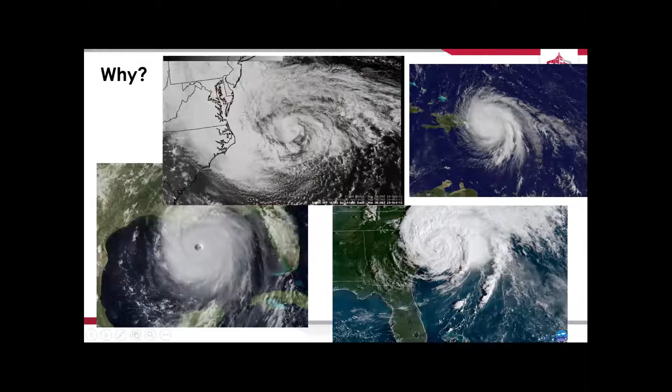So why do we do flood forecasting? Why do we care? Well, given the events of the past week, and really the past year or years, we see that we continue to be impacted by events like what you see on this slide. Pretty much every coastline of the U.S. is impacted by coastal storms of one flavor or another. Here we have Katrina, Florence, Maria, and Hurricane Sandy. Hurricane Sandy is the one that's near and dear to our hearts up here in the Northeast, because it generated a significant amount of damage and impacted us in this region in a manner which we're relatively unused to dealing with. So we know we have this issue.

What does it cause in terms of impacts on transportation infrastructure? This series of pictures illustrates just some of the impacts we see related to these storms. I selected these pictures specifically to point out that when we say transportation, this is intended to cover many aspects—you see airports, trains, buses, cars, cargo containers, bridges, subway tunnels, touching on all different aspects of transportation. Obviously there are many impacts that go beyond transportation, but today we're mostly focusing on transportation impacts.

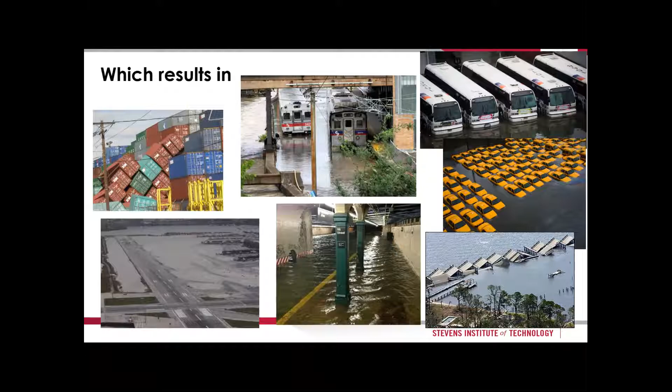Of the pictures you see here, only one, the bridge in the lower right-hand corner, does not correspond to Hurricane Sandy. So these are just examples from my personal neck of the woods up here in New York and New Jersey.

As illustrated on that previous slide, when we talk about flooding, which is something we're generally concerned with here at Stevens, when we think about transportation system impacts, we think of it in a number of different ways. The first way, and certainly the first impetus for our flood modeling research, has to do with actual flooding of major highways, freight and passenger rail, airports, and port facilities. Basically, what's going to get wet and when is it going to get wet.

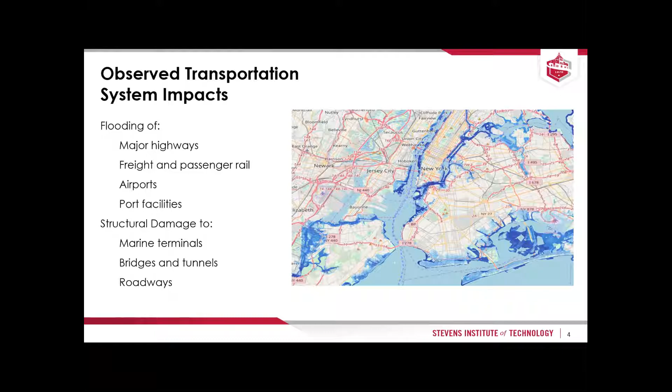That's certainly one aspect, but another aspect which we haven't quite explored in as much detail, but certainly have the capabilities to, is to look at what this water does in terms of structural damage potentially to facilities like marine terminals, bridges, tunnels, and roadways. These are all areas of ongoing research, but there's opportunity to take the flood forecasting and advanced hydrodynamic simulations we're doing now and scale that up for other studies, like studying when bridges might fail. There's certainly more opportunity to go further than where we've come so far.

One of the things that is particularly important for transportation infrastructure is advanced warning. We're concerned not only with predicting how much water is going to get where, but also the timing of that—when is the water going to get high? This is really critical because transportation provides a mechanism for people to evacuate. We need to understand when to begin shutting things down, when to make preparations, change lanes and roadways, and so on. Providing information is only useful if we have enough lead time, so we're able to give information far enough in advance that people can react to it.

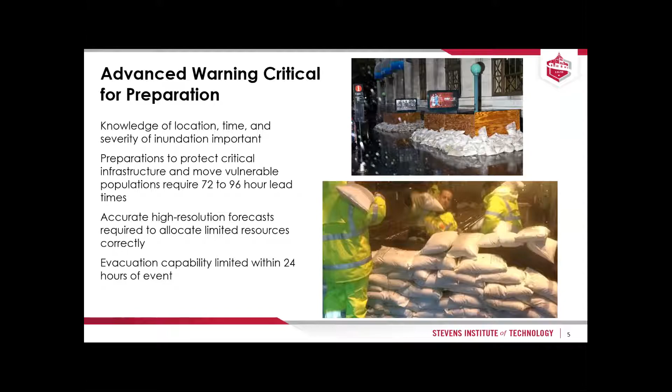In dealing with some of the aftermath of Hurricane Sandy, and working with operations and emergency managers here in New York and New Jersey, roughly 72 to 96 hours is the lead time commonly specified as necessary for making critical decisions. As I said, we've been studying storm surge modeling and flooding here at Stevens for quite some time.

After Sandy, we revived, or changed the way that we look at flooding, and we developed what we call the Stevens Dynamic Overland Inundation Modeling System. It's a system that looks not just at the water when it's out in the ocean, bays, or rivers, but really at what happens to the water when it starts to come onto land. So the overland inundation part is something that's pretty much new for us since Hurricane Sandy.

The background, or the backbone of our modeling, is based off of our New York Harbor Observation and Prediction System. This is a system we've had in place at Stevens for a decade and a half now, predating Sandy. It's basically a system for predicting storm surges, currents, salinities, water temperatures, etc. It's based on a derivative of the Princeton Ocean Model, and it's an operational forecast for NOAA through the IOOS program.

The enhancements we're working on now and perfecting have to do with overland flow, incorporating rainfall—so not just considering water coming in from the ocean or offshore boundaries onto the land, but also water coming down through different watersheds, streams, and tributaries, and making its way into areas. And then ensembling. We'll talk a little bit about most of these.

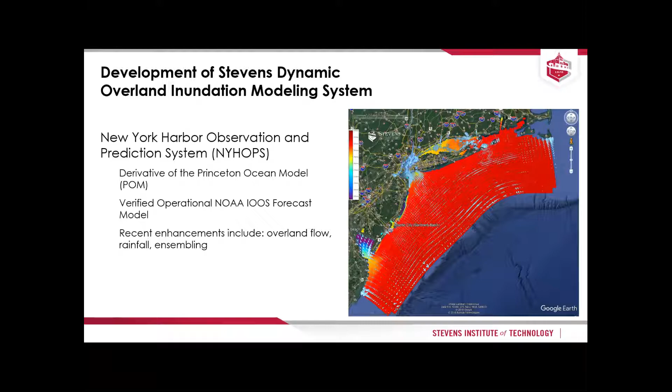For those of you into the geeky side of this, here's some information about the NYHOPS system. It's based on a shallow water version of the Princeton Ocean Model, specifically called ECOM. Our hydrodynamic model is dynamically coupled with a model for predicting waves—in this case, a derivative of the Great Lakes model, modified specifically for our applications, including offshore boundary conditions from swell propagating into the boundary. We use this modeling system as the backbone for everything that we do.

We actually run our NYHOPS model operationally, which means it's run both in storm conditions as well as just day-to-day conditions. There's a number of inputs that go into forcing the model: tides, surges, waves, pressures, rainfall, river discharge, ice, you name it.

There's many inputs that we get from sensors we put out, as well as sensors other people put out, and forecasts from the National Weather Service. All that information goes into the model, which crunches the numbers, and we output 96-hour forecasts multiple times per day. These forecasts include total water levels, currents, salinity, temperature, wave heights, and periods. We've been doing this since 2006.

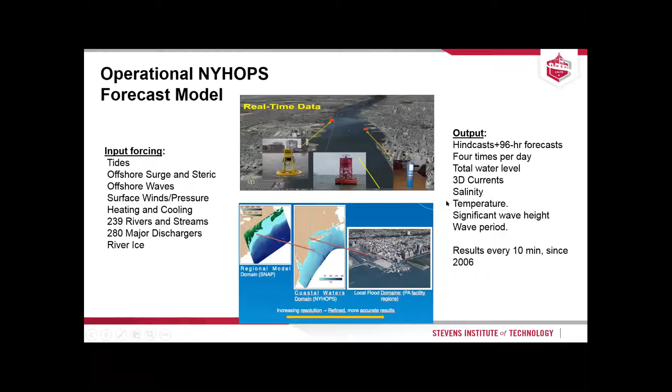One of the new things since Sandy is really understanding how water moves over land and potentially impacts things like transportation infrastructure. In order to do that, we've incorporated an overland flow portion of the model.

This requires really high resolution information related to the topography of the land the water is flowing over. Fortunately, we have lots of great LiDAR data sets now from which we can derive DEMs that are very high resolution, and we use this in combination with numerical techniques, like depth integrated equations of motion, to predict what happens to the water once it reaches that land-water interface.

Based on that, we can predict water levels as well as currents inside of model cells which happen to be over land, or generally dry when there's not a storm occurring.

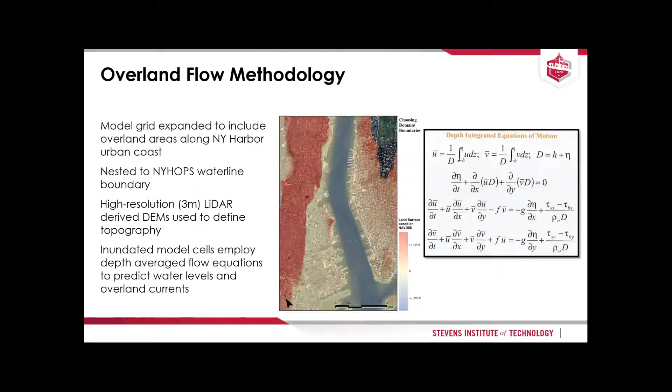So the model, of course, is calibrated. The real thing I wanted to point out is that this can only be done when we have accurate data to ensure we're actually modeling something real. There's a lot of information, a lot of data points that come in that we can calibrate and validate to. So collection of actual real data is an important component of this.

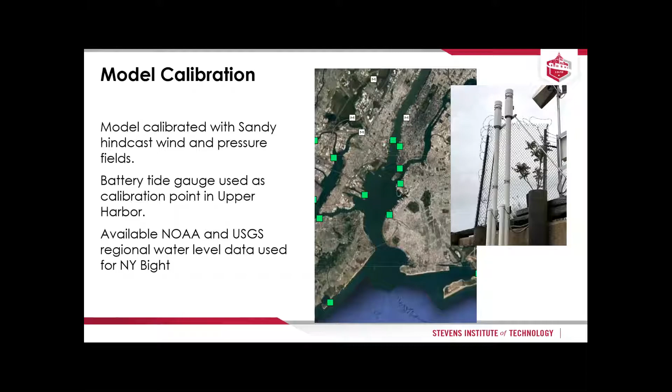The model has been calibrated, particularly for our Sandy calibrations, using the battery tide gauge in the Upper Harbor.

For validation of the model, we took a look at our Sandy simulations, and we validated that using information obtained by the USGS, as well as an interesting thing: we used some crowdsourced pictures for estimating peak water level.

People went out after Hurricane Sandy and took pictures of where they saw water, with a timestamp on that. We were able to utilize some of that as part of our validation, not as an entire validation, but it was interesting to incorporate that technology.

We were just talking about getting on Facebook Live. Well, this is sort of an application of that social media technology.

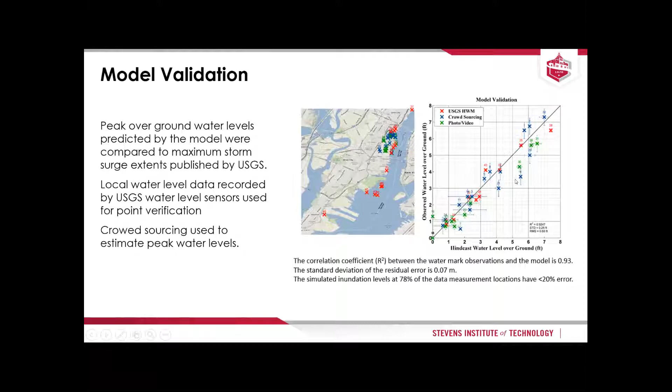Overall, you see in the plot on the right our model validation curve, which shows that the model works really well, meaning we can use it for a lot of interesting things.

Here's an example of an application of the model to transportation infrastructure. What you see here is actually a simulation of flooding during Hurricane Sandy, showing a rail yard.

The movie should be running. Hopefully the video stream is working.

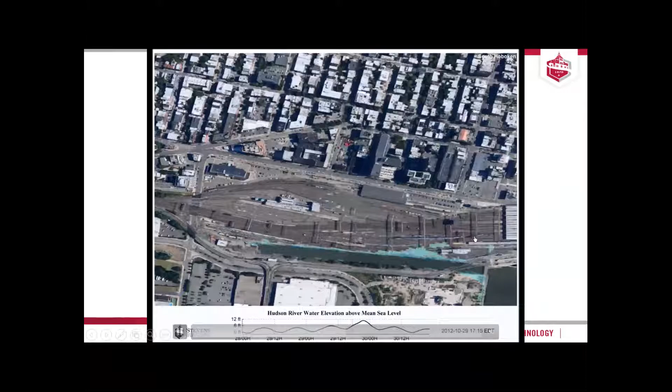What you'll see on the bottom here is the tidal curve. The water starts to get high on the high tide before the peak, then you get towards the peak and the water comes in, and we can figure out what's getting wet and where. The arrows are actually the current velocity vectors, so we're getting not only water surface elevations but also velocities of water. For example, if you have infrastructure here, you can figure out what the loads on that infrastructure might be.

One of the really important things that has allowed us to go out to 96 hours is implementing ensembles. This is one of the main things we've been working on, in addition to the overland flow. In order to predict out a significant amount of time with confidence, we needed to improve the way that we were modeling. Originally, the NYHOPS model was a single model based on a best forecast, but more and more we realized there's all these different ensembles being performed for weather modeling, so we needed to adopt a similar technique for our hydrodynamic modeling. Essentially, we've adopted this ensemble approach where we look at 125 different weather models.

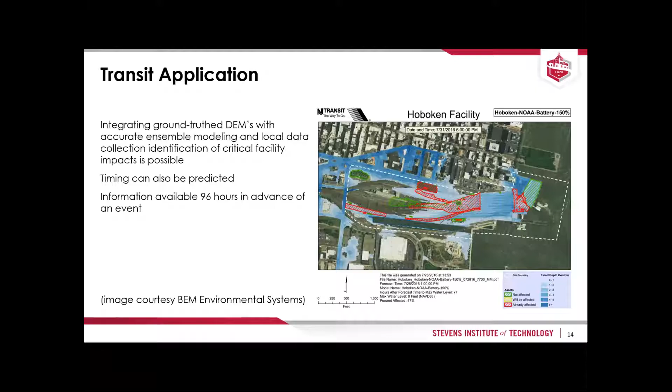So far, everything we've talked about has been on the operational side. We can utilize the information from this type of modeling for operations - for example, if you own that rail yard, you can figure out what precautions you need to take, where you might have to move your trains, et cetera. That's one application of what we do. But with this tool, we can also begin to look at applications to planning and design, through running different types of simulations.

This slide gives an example - we can do different types of scenario building exercises. One of our researchers, Dr. Orton, has worked extensively on taking the models we have and applying them to long-term, long-range climate type scenarios. This allows us to explore different potential sea level rise scenarios - what happens if we add the current trend, what happens if we look at the worst case sea level rise, and how that impacts the values we see, both in terms of flood heights, but also currents, forces, and waves.

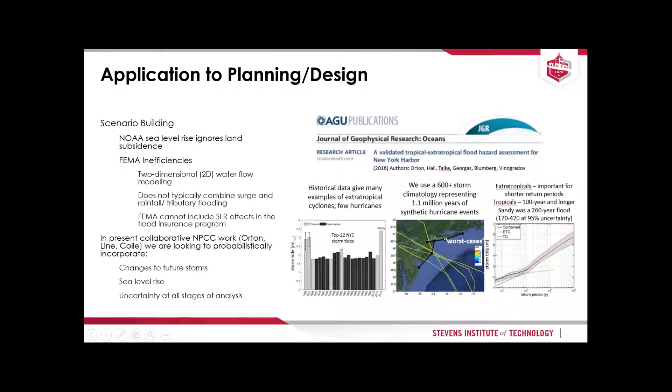I'm already at my conclusions. Basically, hopefully what I've tried to show here is that there's a lot of really interesting work. We've obviously focused on the work that Stevens has been doing here, but in addition to Stevens, there are other groups working on similar types of aspects.

Really, we've come very far in the past decade in terms of being able to use advanced high-resolution hydrodynamic models, and that advancement has allowed us to do things both on the operational side, providing relevant, accurate information for decision makers and emergency management, providing flood forecasts 96 hours in advance. One of the main tools that has allowed us to go out that far with accuracy is the ability to do these types of ensemble modeling approaches.

We didn't really talk about it, but the ensemble modeling approaches require significant computational power. But nowadays, with supercomputers and clusters, this is becoming less of a limitation, so we're beginning to move in that direction more and more. Another thing the ensembling approach allows us to do is provide estimates of uncertainty. The gray envelopes you saw in some of those plots give us an estimate of the maximum and minimum water levels we potentially expect during storms, and that uncertainty can be very important to decision makers, but also on the design side as well.

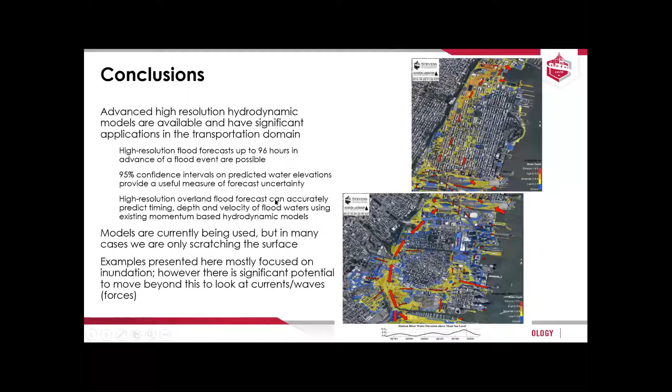And certainly, of course, I want to thank some of our current and former colleagues who have contributed significantly to the development of this model over the past 15 years or so. And I think that's all I had.

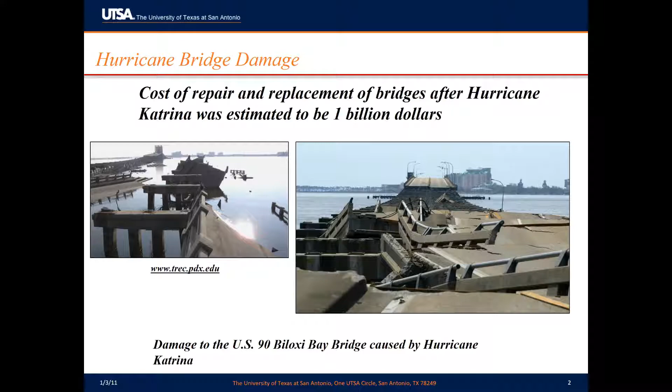We all know the outcome of Hurricane Katrina. It cost a lot of money in terms of damage to infrastructure in Mississippi and Louisiana, and the repair in the aftermath was very significant. So the impetus of our research program is to learn about the hydrodynamic problem so that we can get a better understanding on how to design our bridge structures to be more resilient.

So if we think about the hydrodynamic response of bridge structures, there are two factors that affect it. There's certainly the characteristics of the waves, the height of the storm surge, and the dynamic characteristics of the waves themselves, wave amplitude, wavelength, and others. Didn't want to crowd the screen to make a full comprehensive list.

Folks in the water resources area and hydraulics have done a lot of work related to understanding waves and their characteristics and the type of pressures, if you wish, that they generate on bridge structures. And then there's sort of a dividing line and a gap there, and the structures people maybe come up with some equations to quantify those demands and design the structures appropriately.

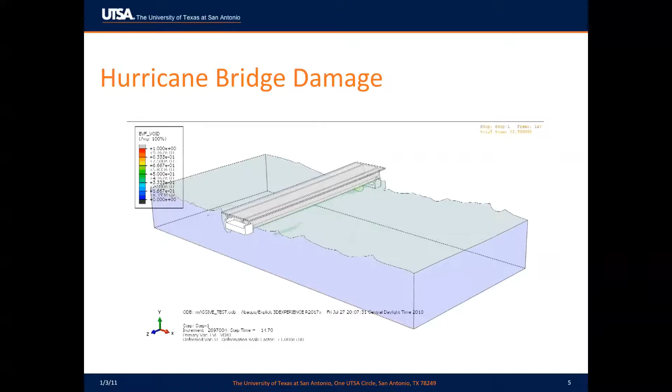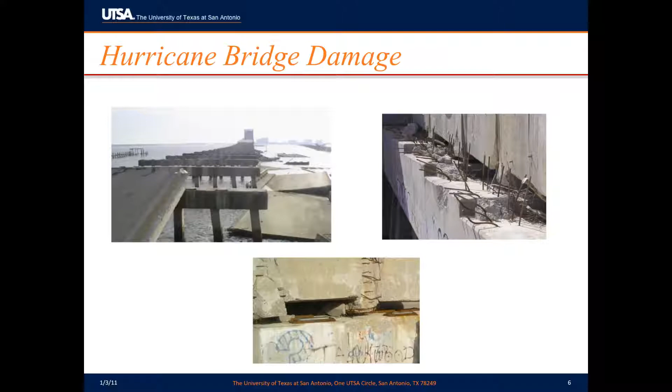And so also reading the reports from Hurricane Katrina, we found a lot of different types of connections. There were instances in which the bridges were simply placed on top of the piers. There were instances in which the bridges were actually anchored with some reinforcement to the piers. And there were instances with shear keys. And there was damage in all of these. So it's the impetus of our project to try to understand a little bit better the magnitude of those forces for different ranges of wave characteristics, so we can understand how to design the connections better.

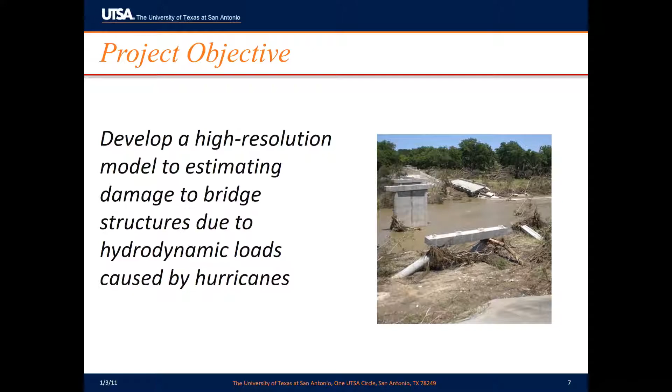There's some similarities between what happens then and what you have in a blast type situation, where you get a very sudden force from the wave impact, and then a dynamic response that follows. That has different implications for the bridge superstructure than for the connections. Those of you who've designed precast panels to blast loads know that the connections between the panels and the building are a real area of concern. The same thing happens in bridges, and we don't understand very well how that evolves and what type of damage we can expect for different types of connections.

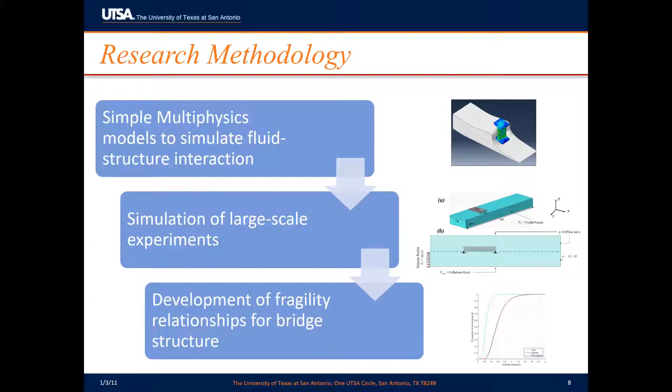One of the areas where there have been helpful developments in computational mechanics is we're beginning to see mainstream multi-physics models that we can use for simulating fluid structure interaction problems. Also, clusters and supercomputers are becoming more common, so we can attack problems that are larger in scale. Ultimately, what we're trying to do is use those methods and the additional computational resources available now to develop fragility relationships, where we quantify the probability of damage that bridge structures incur during hurricanes.

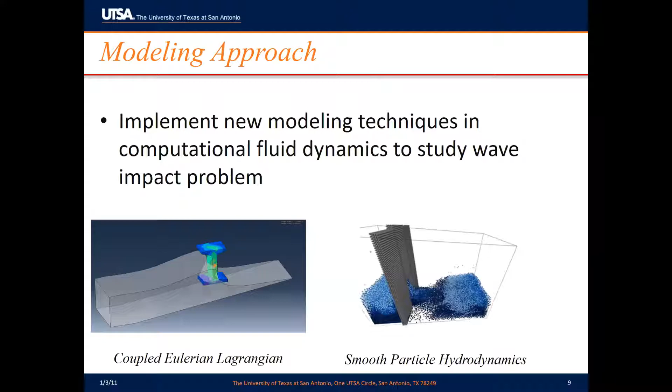Two of the more common recent methods we see in the literature in computational mechanics are coupled Eulerian Lagrangian methods and smooth particle hydrodynamics. When we started this project, we evaluated the possibility of using both methods. I think the development of smooth particle hydrodynamics is very promising, but it lags a bit further behind. So we settled on using coupled Eulerian Lagrangian approaches—they're more mature, and easier to implement with the technology we have available right now.

In these coupled Eulerian-Lagrangian methodologies, we use Lagrangian methods—traditional finite element type analyses—to model the solids. We're solving equilibrium equations of structures simulated as three-dimensional brick elements. In the case of the fluid, we use Eulerian domains, which rely on equations of state for the fluid. For the simulations, we use what's defined in the computer software Abaqus as a USUP fluid type model.

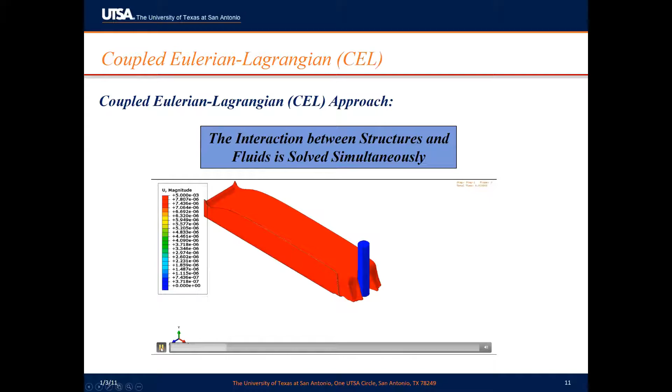So when you create a simulation like that, we have Eulerian and Lagrangian meshes interacting with each other—one simulating the behavior of the fluid, the other simulating the behavior of the solid—and everything responds to the interaction between the two. As the fluid impacts the solid, the solid deforms, and that affects the way the fluid behaves around the solid.

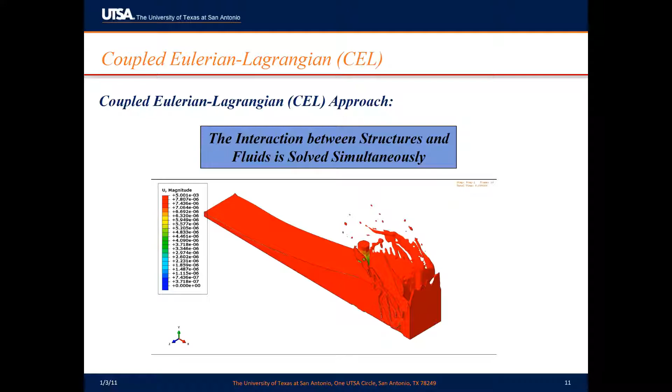These models are computationally very, very expensive—it takes a lot of resources to do a simulation. Our early stage in the project was to develop simpler models to improve the way we simulate the hydrodynamic part. We were concerned about being able to simulate waves correctly, simulate their velocity, and since we're only simulating a small fraction of what is a very large domain, we have to worry about waves being reflected or not reflected accurately. So we need to understand how to model inlets and outlets properly.

In addition to modeling the wave, a big part of this component is that you have to simulate the impact of the wave properly. Which means we need to be able to have confidence that the forces we calculate during impact are estimated accurately.

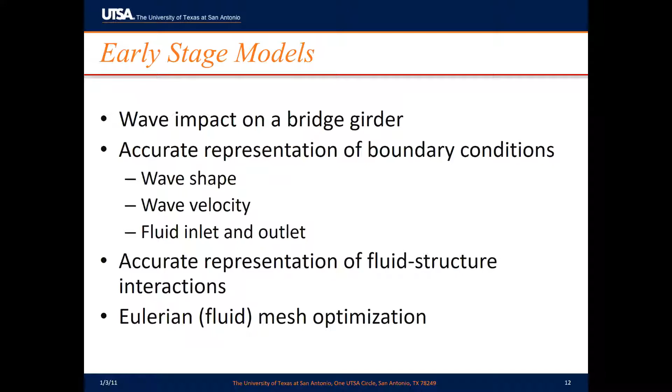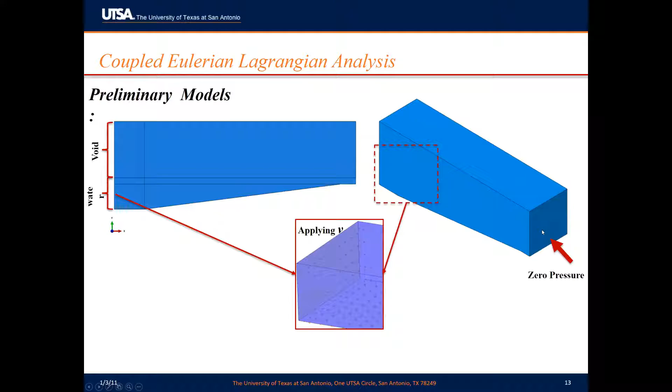This type of simulation we've been performing in the computer program Abaqus. So the way we start, this is a typical simulation with just a fluid—there is no solid in this one. We model an entire Eulerian domain; some of it is filled with water, some we leave as void. Then we apply velocity boundary conditions to form a wave, and zero pressure on the other end to provide for the possibility of an outlet.

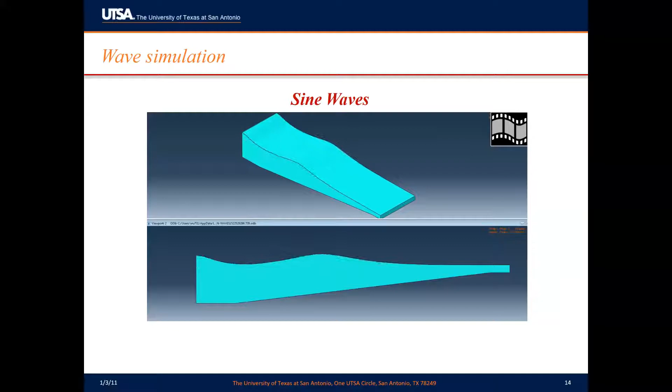This shows the simulation of a wave, and as you see, we're generating a velocity field on the left end in a sinusoidal fashion, and that forms a wave that propagates from left to right on the Eulerian domain. Our goal is to be very confident that when we set the amplitude and frequency of that boundary condition, we generate waves with a certain amplitude and period, because that would be one of the engineering design parameters we'd want to study. Then we migrate to models where we have a solid embedded in it—this is just a very simple model with a piece of an I-girder.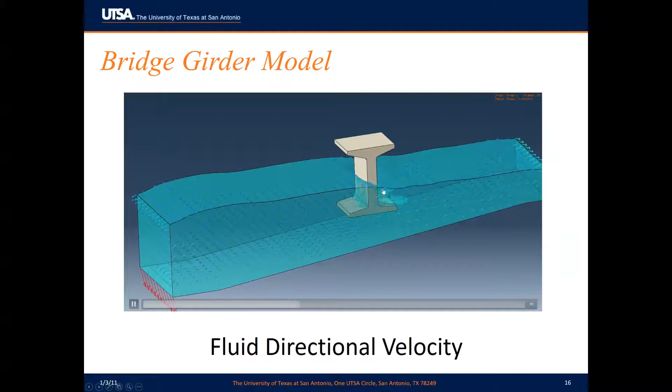So this simulation shows the fluid and the velocity field within the fluid, and interestingly shows the interaction between the fluid and the structure, and the way that the structure affects the behavior of the fluid. It seems very natural flow. We were quite happy to see the way that the fluid reacted when it went around the girder.

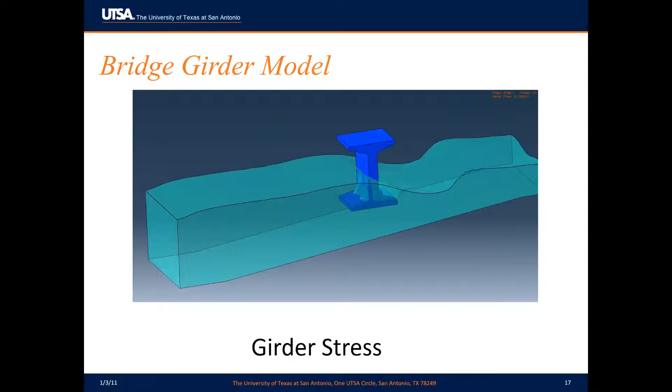The other part of this is we're also concerned about what the solid is doing. So if we forget about the fluid for a minute and focus on the solid, this video shows the calculated stresses on the girder. This implies that the fluid is doing its part and that the solid is also observing some deformation as a result of the impact of the fluid on it.

So we can generate stress contours as the wave progresses through the fluid. Once we have these simple models, then we move on to use larger calibrations.

There are two experiments that I'm going to be talking about today. One was performed on the Oregon State flume, simulating the tsunami impact of a wave on a timber wall. The second one, I think more relevant, is a bridge that had been modeled many different times, so it's a great platform to develop confidence on this type of modeling. It's a bridge on I-10 over Escambia Bay that was damaged during Ivan.

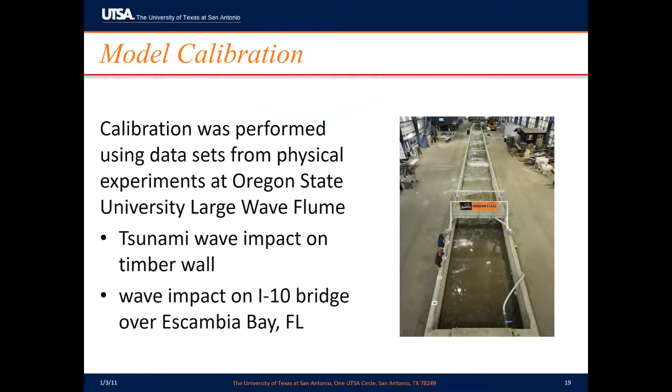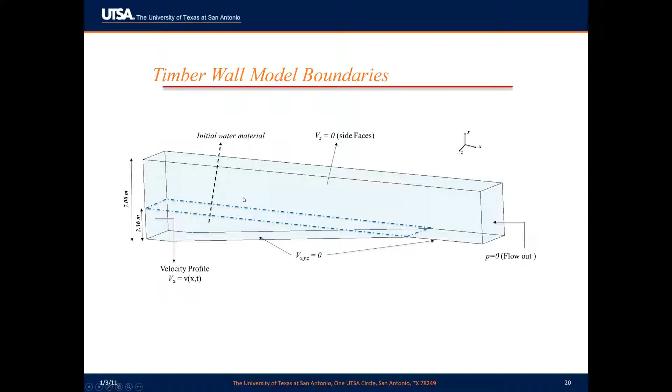So for the timber wall boundary, this is the Eulerian domain, the water level, and the boundary conditions as we specified, trying to simulate or replicate the geometry of the flume.

As we generate the waves, this is at a velocity of 2.2. The wave comes up and then impacts on the wall, as you can see over there. The wall is made out of timber. It's a fairly flexible wall.

Throughout this experiment, there were measurements that monitored the height of the fluid, the velocity of the fluid, and also the forces and deformations in the wall. This gave us a lot of different places where we could track the goodness of fit of our simulation.

For example, this is one of the locations where the researchers measured the wave height. We see in this graph a comparison between measured and calculated water elevation versus time.

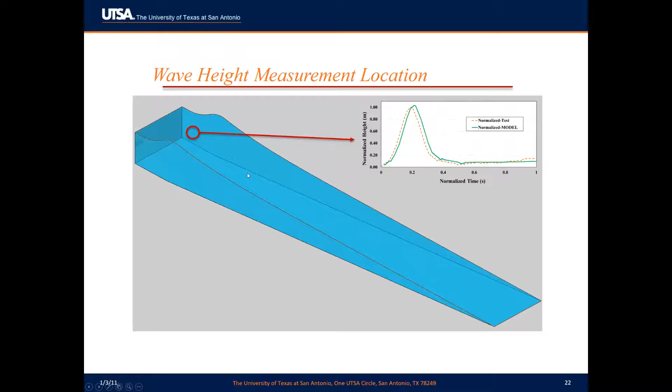There are several other points which we check. Again, one of our major concerns is being able to generate those impact forces properly.

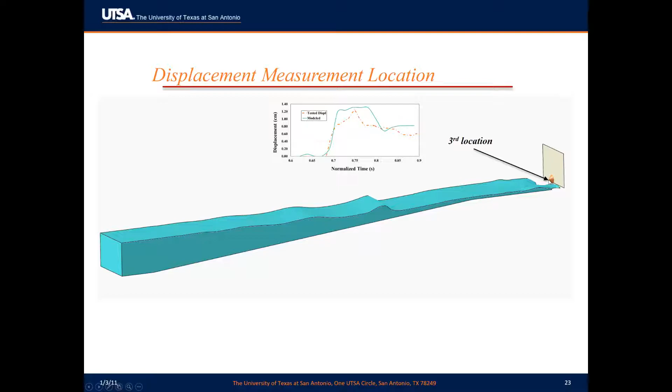At the wall, there was a location where they monitored displacement. We show a comparison between the test in orange and the model in green that tracks the displacement of a point in the center of the wall near the bottom. We were able to obtain pretty decent matches.

The one that we had the most concern about was being able to simulate the reaction forces on the timber wall as the wave impacted it. We were able to obtain a relatively good match between the forces that were calculated and the forces that were measured.

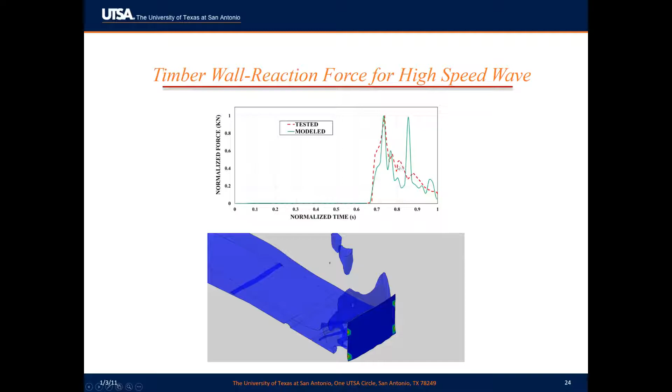Here we see a bit of that effect I was mentioning before, where the wave comes in, impacts on the timber structure, and generates a very high amount of force, which then subsides and gives way to a more hydrostatic, more constant type of force. The effect of that peak on connections and on the dynamic response of the structure is an important question that we need to learn a lot more about.

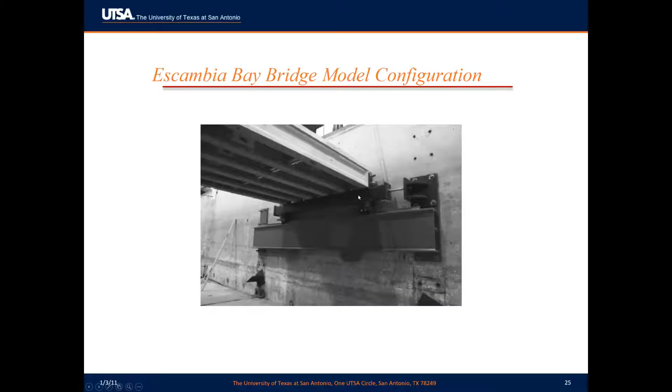Now we see the limitations. Even though they did some things to simulate the flexibility of the substructure, that becomes a matter of question and a matter of research. So this is what the computer model looks like.

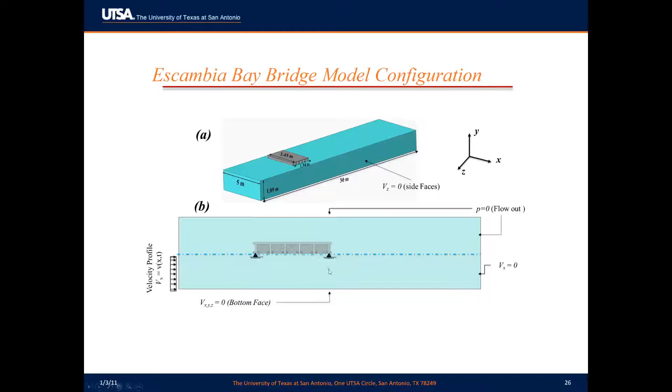We model a segment of the bridge. In this case, in the results that I'm going to present quickly today, we used a fixed foundation, so it neglects the deformation or the ability of the substructure to deform.

This image shows the simulation. We generate a wave in the same way that we've been describing. That wave impacts the bridge and generates forces on the bridge, and then we calculate the reaction forces that are generated as a result of the wave impact.

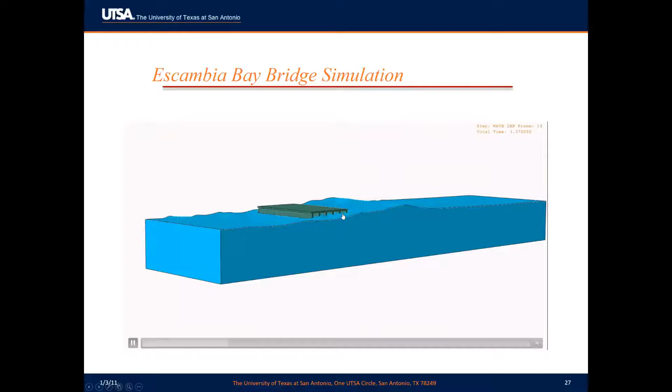So this shows the amplitude of the wave.

I'm running short on time, as a matter of fact I'm down to my last slide. What's important from this slide is that those values are representative, once you account for scale factors, of what you might have expected in Hurricane Ivan.

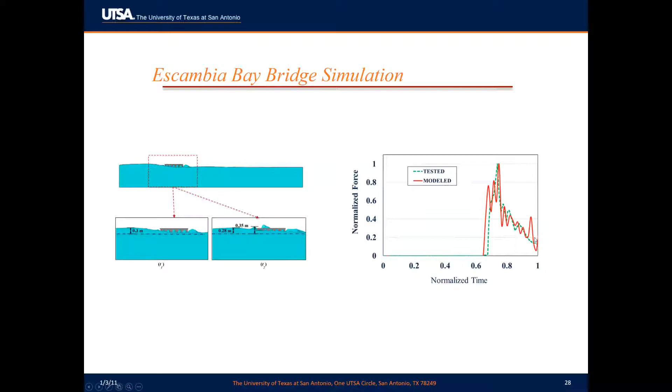We have this same type of behavior where the wave impacts the bridge, driving a very large increase in force at the moment of impact, a very large force over a short duration, and then the effects subside over time. So we can calculate reaction forces in either the vertical or horizontal direction, or we can calculate the resultant, which accounts for vertical, horizontal, and uplift.

These numbers, normalized to bridge weight, are extremely high. We think part of the reasoning is that we're not properly accounting for the flexibility of the substructure in this problem, and that's certainly one of the questions we hope to answer with our ongoing research.

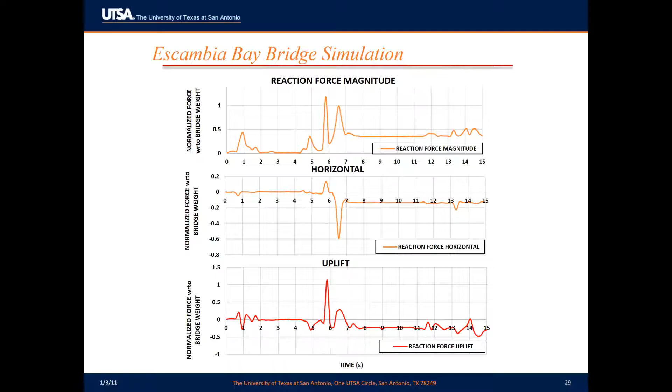So again, our future work is to begin understanding a little better how these models work and how to develop more confidence in them, and then use them to study different types of support conditions and connections, and what type of damage one might expect to those connections as a result of hurricane-type excitation. So I'll leave my presentation here.

I think I actually went two minutes over, so I'm going to pass the baton back to Chris.

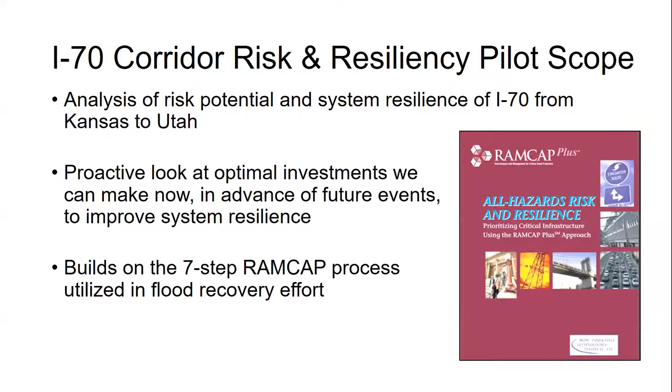Next slide, please. That process, here are the 7 steps in it. I'm not going to go through each of them, but it lays out a framework by which anyone can really use this methodology to analyze what the dollar cost risk is of various types of threats.

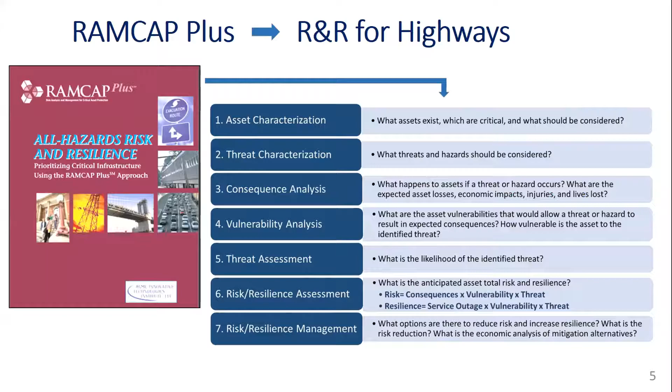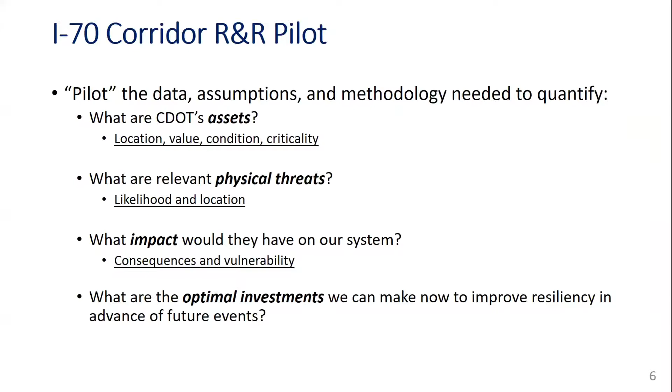In layman's terms, this is the way that I like to describe what RAMCAP did, is that we looked at what were CDOT's assets, so what's the location, value, condition, and criticality of all of those assets. What are the physical threats that are relevant to those assets? What's their likelihood and the location that they might happen? What impact would those threats have to our system? Looking at what are the consequences, how vulnerable are our bridge structures and roadways to those sorts of events? And then finally, what are the optimal investments that we can make now to improve resiliency in advance of future events?

So a couple of key concepts. In the RAMCAP model, risk is defined as the probability of the threat, how vulnerable our assets are to that threat, and then the consequences. So it gives us an annualized dollar cost risk associated with that with different threat asset pairs. Risk is the potential cost of losses to CDOT assets, both as an owner and to our users. And then resilience is the ability to remain functional even in the presence of those risks.

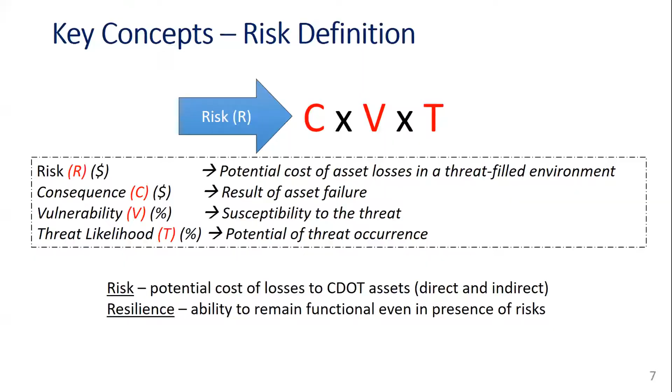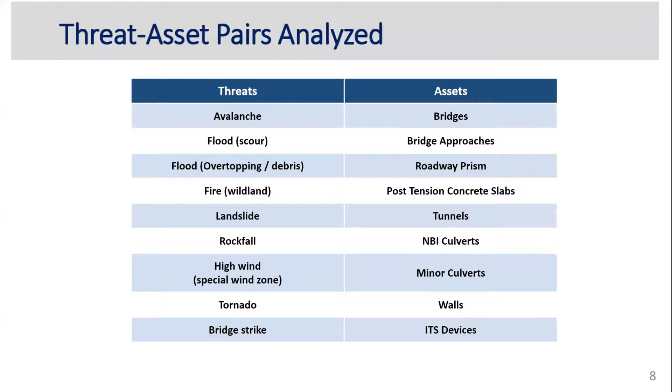One of the really nice things about the RAMCAP model is that it is an all hazards methodology. So it looks at all different types of hazards, not just focusing on one. So we looked at all of the threats that you see on the left-hand column there, and looked at all of the asset classes that are shown on the right, and really looked at threat asset pairs and what those potential risks are.

One of the things that the RAMCAP methodology does is to look at what are the most critical assets on our system, and by critical, it's critical in terms of resiliency. The way that I like to describe that is which assets, if they were taken out, if they were destroyed, would most have the largest operational impact on our system. And we wanted to refine that in a way that made sense socially, economically, and environmentally. So this was the model we used to identify which assets are most critical.

We looked at usage, which roadways were carrying the most traffic, economic impact in terms of how much freight was being transported on those roadways and what's the value of those roadways to our tourist industry. Social impact we measured by the Social Vulnerability Index, which is a multi-variable index that shows how vulnerable a population is, how difficult it is for a population to recover from various events. So it looks at a lot of socioeconomic characteristics of a population. And then system impact - are there redundant routes that would allow, if a certain roadway was taken out, that there were alternate routes that could serve as a detour. And if there weren't, then maybe that's a more critical asset.

So next slide shows the map that resulted from that criticality analysis. So you'll see that we do have a number of areas that are more critical in the state than others in terms of our assets, which we thought was a good indicator that we were seeing a good model for which assets are most critical.

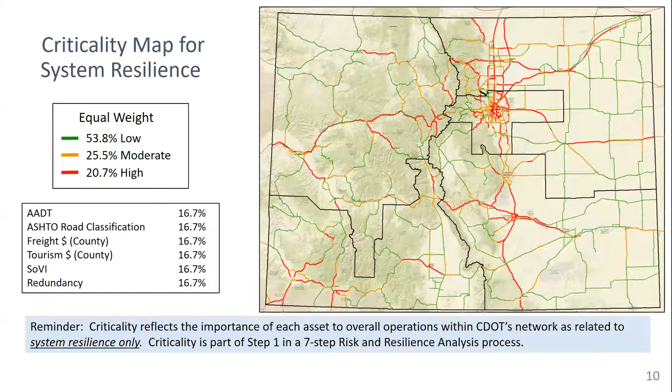So then we did the consequence analysis, which was what happens during the worst reasonable event. What are the consequences? We looked at, for instance, flood and bridge, rockfall and roadway prism. What's calculated from that is both the owner cost, which is the asset replacement cost, and the user cost, which is largely driven by the value of time as a result of delay or detour. So that's what the RAMCAP model delivers for us: an annualized risk, both owner cost and user cost, that would happen with the worst reasonable event on all of our facilities.

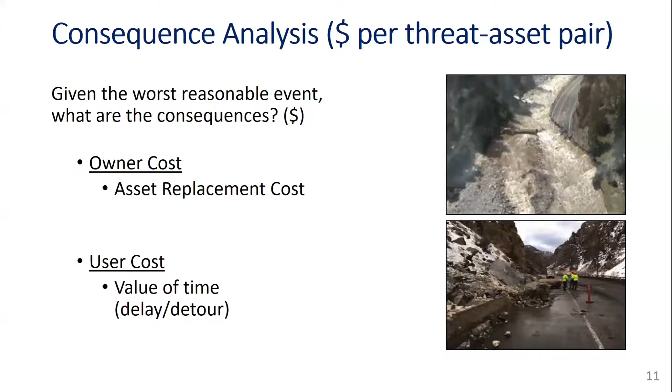The results can be sliced and diced in many ways. At the top, you can see the whole entire corridor from the Kansas to the Utah border and going through Denver. We were able to segment that corridor into different segments, named from A through M. The way we segmented the corridor was just based on logical entry and exit points off of the road.

This slide represents the total risk that we calculated by these corridor segments that we partitioned the road by. As you can see, segment B has the highest risk valuation, about 85 million off the entire corridor. That is also a highly critical corridor.

If you look at the bottom, the red and the yellow shows the criticality of the segment. It's what Lizzie just talked about, that criticality map. So not only does segment B have the highest risk valuation, but it's also a highly critical segment. That segment in particular goes from Rifle to Loma in Colorado, and what's driving that risk valuation is really flood risk because the Colorado River just goes along the road throughout that whole stretch of that segment.

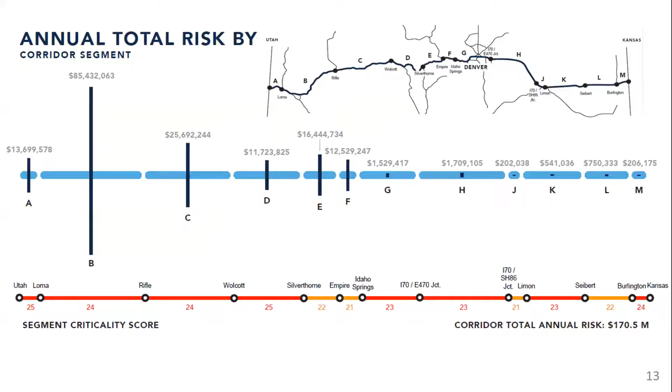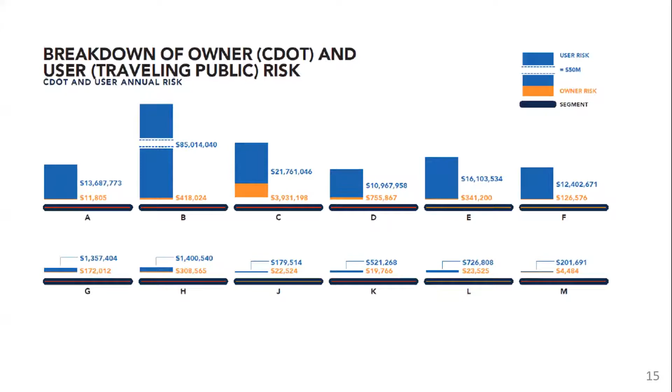Let's move on to the next slide. This is another way to look at the data, showing basically one segment. Segment C, circled in red at the bottom, shows that on that segment, rockfall is the highest risk, followed by flood, followed by bridge vehicle strikes, and it also gives you a total risk for that segment. So there are multiple ways to look at the data depending on what you're looking for and what you want to do with it.

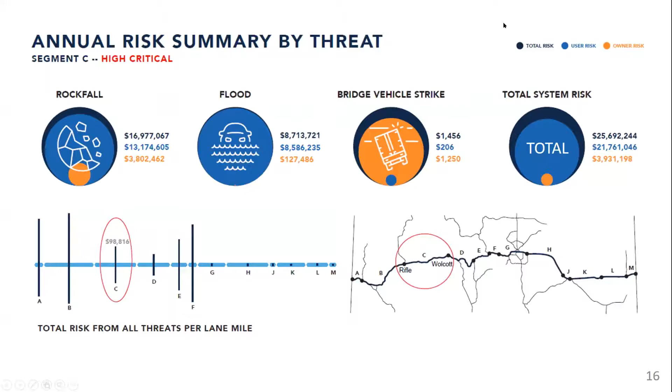Let's move on to the next slide. So what we did next, now that we have risk valuations for all of the assets and all of the threats and all of the locations that came up as problematic and risky in the pilot, now that we have those valuations, how do we really use them? What do we do with them?

So we took a deeper dive at 5 specific sites, and we tried to incorporate this risk valuation in benefit cost analysis of different mitigation alternatives at each site. So we chose a variety of threats and assets: a flood and bridge example, rockfall and PTCS, which is those concrete slabs I was talking about. We also have a flood and bridge approach, a flood and minor culvert, and the landslide and roadway example.

I'm not going to go through all of these, but I'm going to do a deep dive into one of them. One thing I do want to mention is that we've seen, even from the federal government, a push to incorporate resilience and quantifying resilience into benefit costs. If any of the DOTs online have applied for INFRA or BUILD grants, and if you've read those benefit cost guidelines from the US DOT, they've just added, for this go-around this year, a chapter on resilience and how it can be incorporated into benefit costs, and how if you do have these valuations, you should really be incorporating them. So I'm going to go over an example of how we can do that, and that example is number 2, the rockfall and PTCS example.

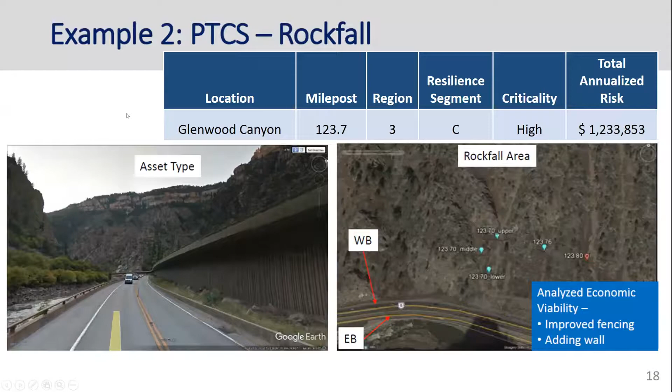So next, what we did was go to our CDOT experts and try to figure out what mitigation measures we could put in place at this site to make it more resilient. There were 2 options suggested. Option 1 was to replace the existing 5 fences, which were 2,000-kilojoule fences, with 5,000-kilojoule fences. The cost of mitigation for the entire site, replacing all 5 fences, is 1.4 million. The second option suggested by CDOT experts was to keep the fences we have in place and build a new 140-foot wall in addition to the fences on the site. This second option came up to a cost of about $350,000 to build a wall.

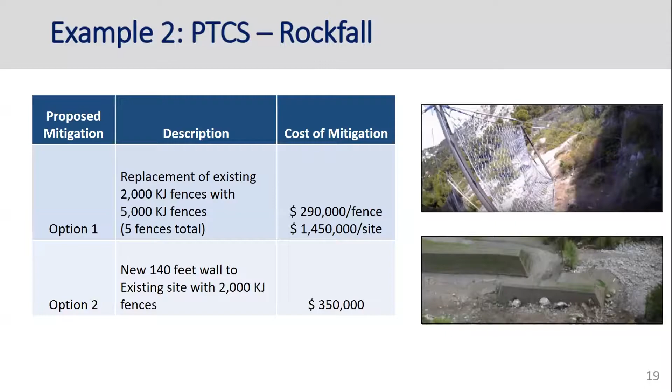Because of the higher cost for option 1, perhaps option 2 is better. I should really say that anything with a benefit-cost ratio above 1 is worth considering by a public agency. But you do have to take into account the reduction in risk, as well as the cost of the mitigation measures. So this is one way that you can incorporate risk valuations and resilience into a benefit-cost analysis.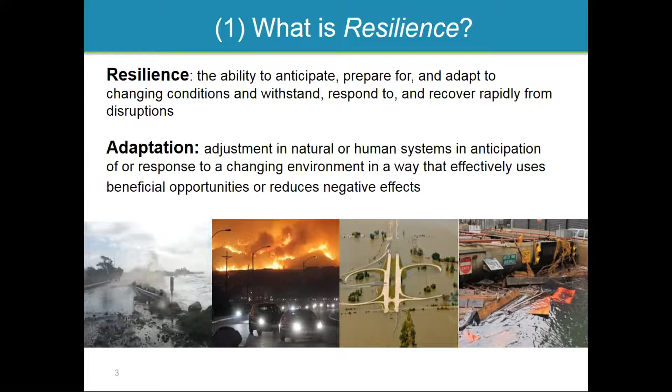But in addition to thinking about current threats, we also need to consider long-term change. While we think about resilience as it relates to current conditions, we also need to think about how those conditions will change in the future. If we build a bridge today—and I think our second speaker spoke a lot about what can happen to bridges along the Gulf Coast region—if we go in now to replace a bridge, we need to think about what that environment will be 75 years from now. Obviously we can't predict it exactly, but we can think about what it could be, given an understanding of how the environment is changing. So in a nutshell, assets need to last, and we need to build them to last.

At Federal Highways, we try to focus on resilience in basically 3 different categories. We think about resilience at the planning scale—at the state and metropolitan planning scale—we focus on project-level issues, and also operations and maintenance. I'll speak mostly about the planning scale and the project level and project development scales.

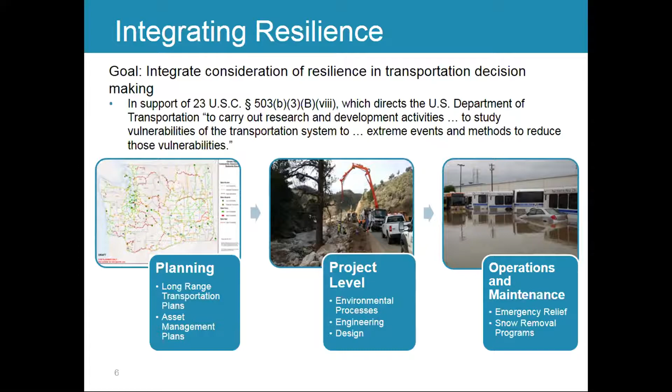The Department of Transportation, in its strategic plan released earlier this year, highlighted several things considered very important by the department. One is that DOT would commit to increased effectiveness to ensure that infrastructure is resilient to extreme weather. That means making sure we build infrastructure and consider how we build it through asset management and project development to make it last.

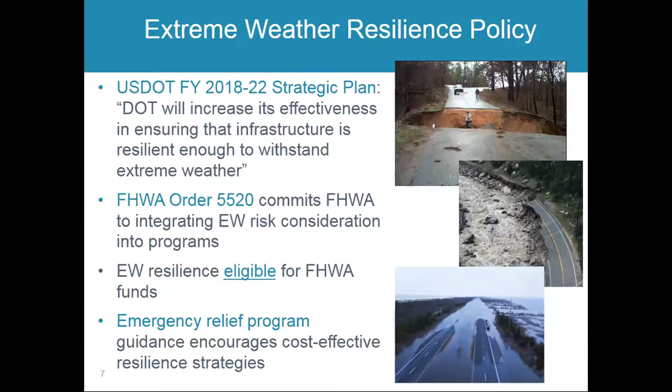Federal Highways issued an order 4 years ago committing the agency to focus on resilience to extreme weather events going forward. We've also tried to deal with this through eligibility notes on what is eligible for funding, and through the ER program. More recently, we have the risk-based asset management regulation now in effect. At this point, asset management plans must address risks associated with current and future environmental conditions, and assets that require repeated repair under Section 667. There's an analysis process states are going through right now to understand where assets have needed to be repeatedly repaired over the last 2 decades.

Metropolitan planning organizations are also supposed to, in their long-range transportation plans, analyze projects that can help reduce vulnerability of their transportation systems. So that's just a broad overview of some of the policy and regulations that affect us and where we're headed.

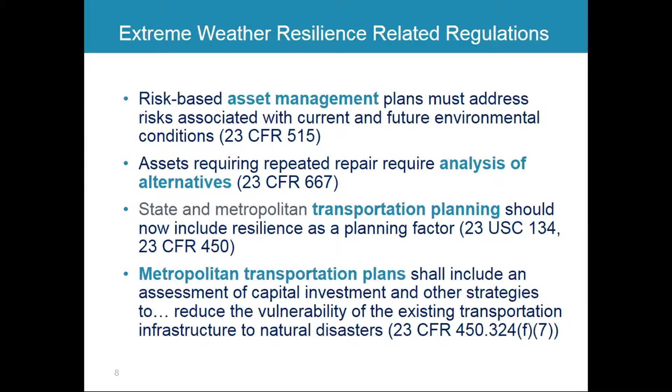We also had programs that went the next step, where states were going in to understand not just what was vulnerable, but how to improve those assets to make them more resilient in the future. And then we have two other programs that are about halfway through that I'll talk briefly about next.

So the first up is the nature-based resilience pilot program. Nature-based features is another way to talk about what we also call green infrastructure. That's basically referring to man-made features that are done to work with or mimic natural processes. This particular pilot program focuses on coastal areas, and many of the pilots are investigating things like supplementing marshes, dunes, beach nourishment, supporting wetlands, and rock revetments.

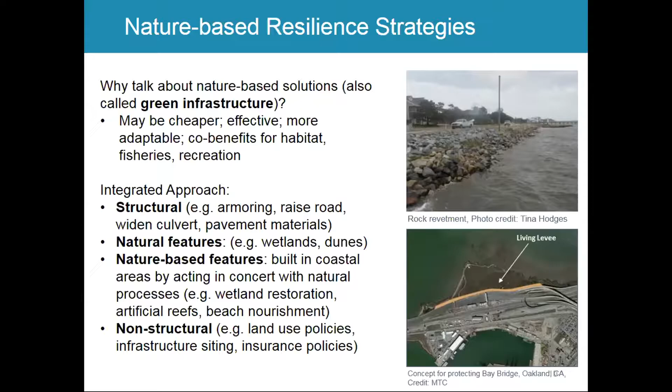One of the reasons we're interested in nature-based features is that they can oftentimes be cheaper than, say, putting in something like a seawall. They can also be more effective in dealing with sea level rise, at least in the near term. There can also be co-benefits for habitat, fisheries, and recreation. And one of the things we try to talk about and support is the idea of an integrated approach that uses some mixture of structural options along with nature-based features and also policy features that can help protect assets.

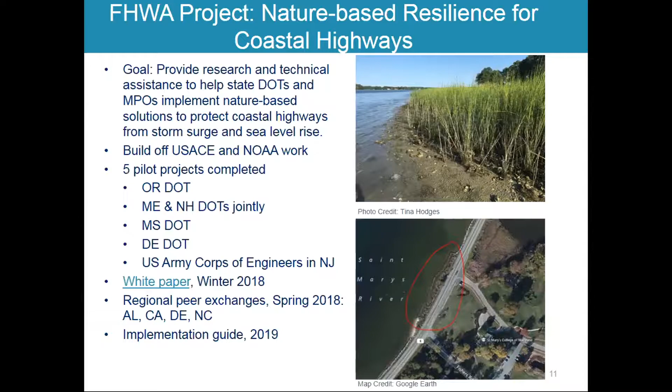So currently there is an ongoing pilot program. The 5 pilots, I think, are just about done. Many of these are already posted on the Federal Highways website. It's Oregon, Maine and New Hampshire, Mississippi, Delaware, and then one that involved New Jersey and the Army Corps of Engineers. There's a white paper being put together, as well as an implementation guide, which will summarize options and ideas about how to use nature-based features going forward, and that will come out next year.

Anyway, these pilots are about halfway through. We expect to have these done by the end of the year. As part of that, we'll also be developing a guidebook that will pull together lessons learned from these 6 pilots and spread this out to the rest of the states. One of the things an earlier speaker also focused on, and something we're finding in all our pilot programs, but particularly in asset management, is this need to break down silos, where we're trying to get planners, asset managers, and environmental people, as well as engineers, to work together, since they may come from different perspectives about the environment and how to deal with it.

So just in a nutshell, what is asset management? To some people it may be somewhat of a new term. Asset management is really a systematic process of operating, maintaining, and improving assets to identify a structured sequence of activities to achieve and sustain a desired state of good repair over the life cycle of the asset at minimum practicable cost. So one of the key features of asset management is to think about assets over their entire life cycle, finding the best ways to either maintain or improve the quality of those assets and the services they provide at minimum cost.

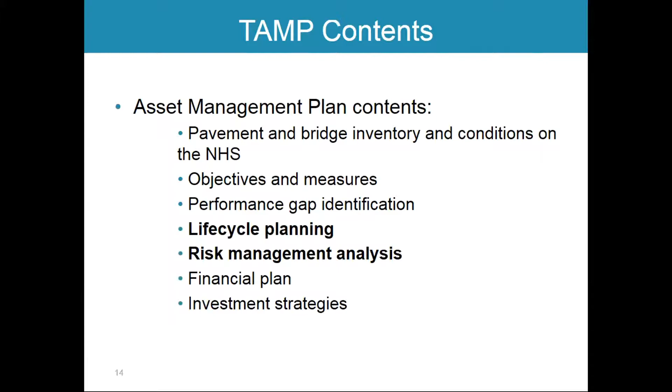So when we think about risk management and life cycle planning, resilience is one of the key factors to consider. Within the plan, states are putting together a risk management plan intended to identify the risks associated with current but also future environmental conditions, including extreme weather events. The life cycle planning part should also include a range of factors that could affect the whole life cost of assets, including threats posed by those risks.

Life cycle planning is considering investment needs over the service lives of those assets, which could be 50 years, could be 75 years for bridges. And in considering what that logical sequence of interventions is to maintain those assets in a state of good repair at least cost, that can be boiled down to some extent to these 10-year financial plans that are also at the heart of the asset management planning process.

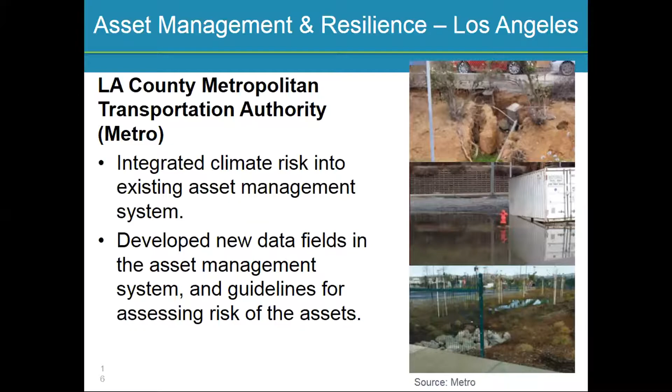I just want to mention a couple places that are already doing this to some extent. There's LA County Metro in Los Angeles, which deals with both transit assets and highway assets. They've already started to integrate climate risk into existing asset management systems, included new data fields within their asset management systems to store that information, and also developed guidelines for assessing risks to those assets. MARTA in Atlanta has also done similar things.

There is one other pilot program that I'm not really going to say much about. It just got started a few months ago. I think there are 10 or 11 pilots at this point, and they're basically doing three different things. There's one or two pilots that are working to deploy a resilient solution and monitor it over the long term, so that will really go past 2020. Massachusetts is one of those.

There are also several pilots that are working to integrate resilience and durability into their general agency practices and policies. And then there's a third group that is doing something similar to our previous pilots, where they're using existing tools that either they've developed or Federal Highways has developed to assess vulnerability and risk, and then also in some cases to develop options for protecting individual assets for the transportation system in their states.

There are a few tools that we've developed to help areas understand how to conduct vulnerability assessments and how to get information on future environmental conditions. And there's also been some work on operations and maintenance. So I just want to talk about a couple of these. The first, for people who may be somewhat newer to vulnerability, the first place to start for at least Federal Highways tools and processes is the Vulnerability Assessment and Adaptation Framework.

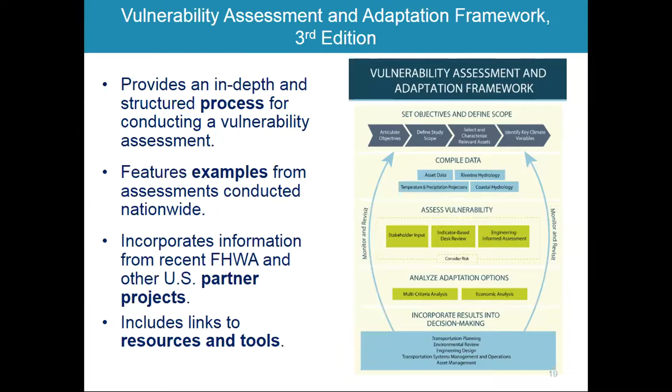But once a state or an MPO has put together information and assessed the vulnerability, then part of the real work is to decide what to do about it and how. The last speaker spoke very articulately about economic analysis and how to use those tools to weigh different adaptation options, considering both benefits and costs. That's very important to think about. But there are all sorts of other decisions that can be made with this information, both at the planning level and the project level, and other phases of transportation.

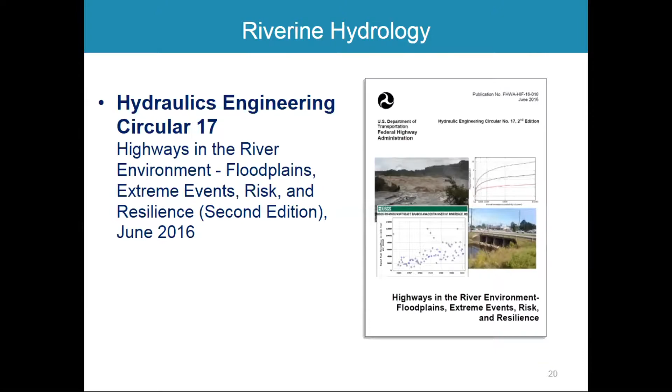So the framework highlights a few individual tools, and I wanted to highlight a couple more. Our Office of Bridges and Structures and the Office of Infrastructure have put out two hydraulic engineering manuals. HEC 17 is the first one, and it focuses on understanding the riverine environment and how future changes in precipitation can lead to changes in flooding. That was put out a little over 2 years ago. A similar document was completed in 2014 focused on coastal areas. Both documents provide information about our current understanding of how precipitation or coastal issues are changing, and they walk the user through different levels of analysis for future precipitation or inundation levels.

The second one, which focuses on coastal issues, is currently being updated. Among other things, it will include information pulled from the green infrastructure work.

It identifies lessons learned from all the different projects. It discusses the kinds of vulnerabilities to future situations and also adaptation strategies. These are organized based on sub-categories, whether it's coastal or riverine, geotech, pavement and soils issues, and also mechanical and electrical systems. Some of the work on electrical systems is tied to bridges in the area affected by Hurricane Sandy.